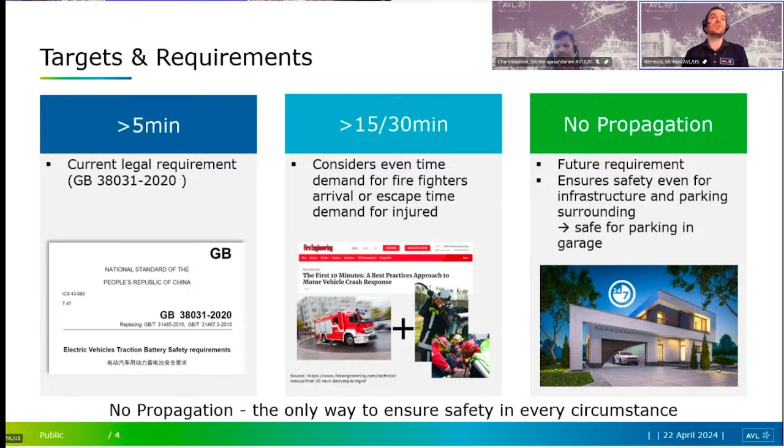Some of the requirements and targets within the automotive industry regarding battery safety: they want to be able to have no more than - I guess 5 minutes is currently the legal requirement to make sure the battery is safe for at least 5 minutes. Then there are other requirements for 15 to 30 minutes because it takes time for the fire department to show up. In theory, you really don't want any propagation outside of the pack, because these vehicles will be parked in garages that can cause peripheral damage to the house or parking structure, with other vehicles nearby. So just because you meet the regulation doesn't necessarily mean that's the ideal product. The regulation is just there as guidance, but almost all the OEMs want an ambition for no breaching of the pack.

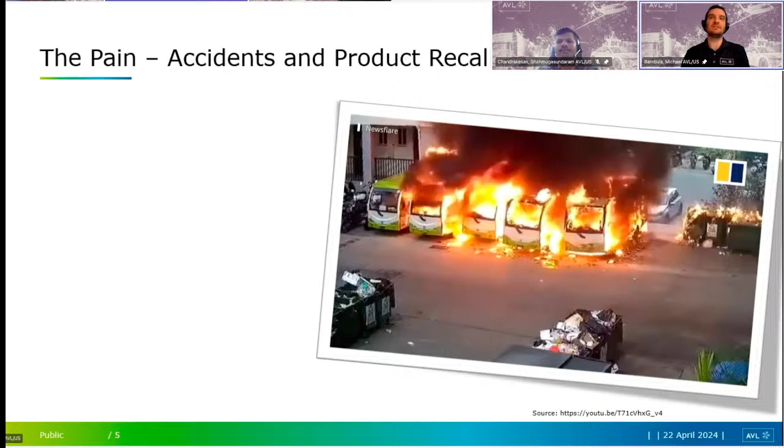This is an example of why you might want that. This is a bus fire that occurred in China. You can see this bus was an electric bus, it caught fire, and there are other buses around it where it's actually spreading. Because you had the problem in one bus, it should have just been contained to the damage of that single bus, but because it breached the pack, it spread and caused other damage it otherwise wouldn't have. Especially with such a large energy release and all this smoke and chemicals, you likely are going to have an evacuation of the vicinity because these are toxic gases - residents will also likely have to leave and quarantine from the area. So that shows the damage you can have from a thermal runaway.

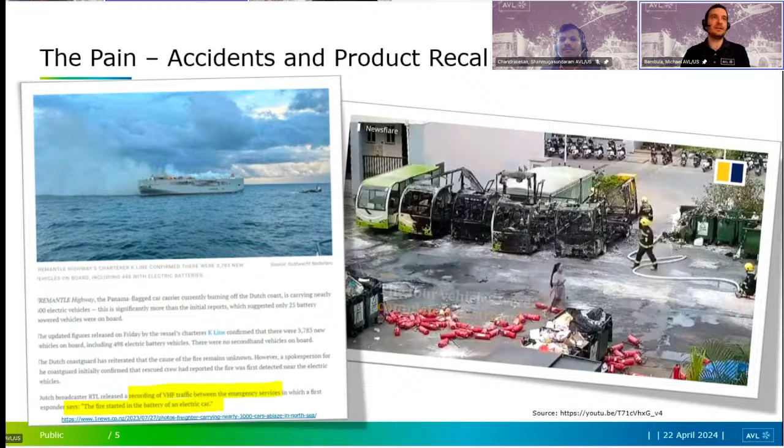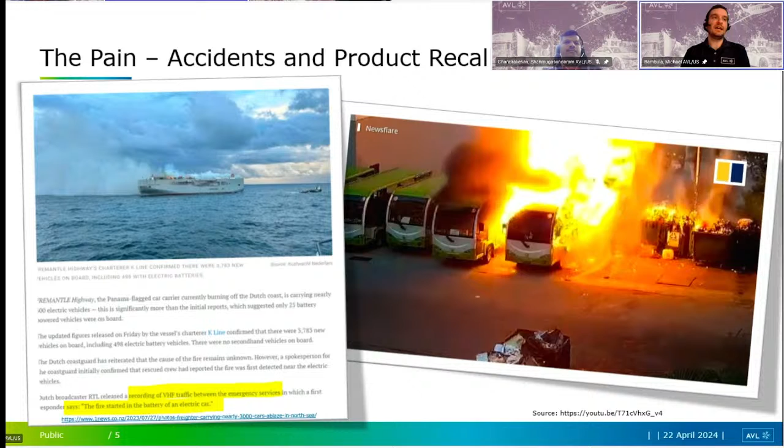This was another event that had occurred. You may have heard about these boats that catch fire while transporting vehicles from Europe to the U.S., or U.S. to Europe and Asia, wherever they go. This boat had 500 electric vehicles on board, and they mentioned during the emergency call that a fire had started with a battery electric vehicle, which effectively spread throughout the vessel and caused collateral damage to the other vehicles. Even more risky, fire at sea is one of the worst things on a boat because there's not much you can do at that point, and it can definitely cause the boat to sink. So these are some of the challenges of why you want mitigation of that thermal runaway event - you either want it contained for as long as possible, or ideally never breach the pack.

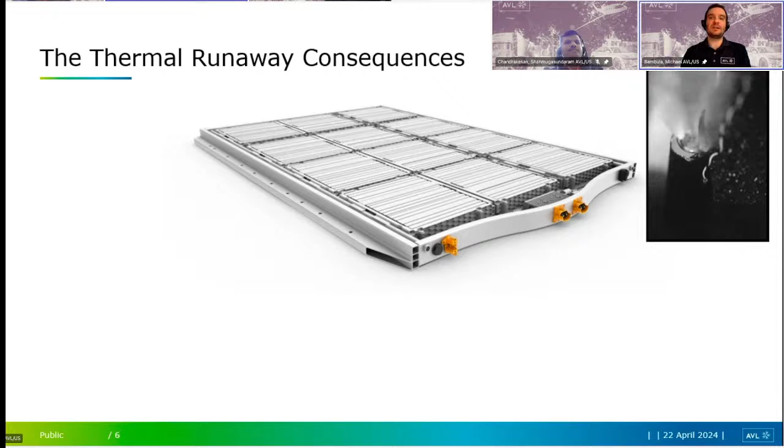So these are just some of the thermal runaway consequences here. All of these are very loud events with this microphone, but basically what you're seeing is particle release from when a thermal runaway event occurs.

You're seeing venting into the vehicle underhood. So this is a breach, but it could be a strategic breach due to relieving pressure. There's also deformed packs that can occur during thermal runaway, and then you have melting and flammability.

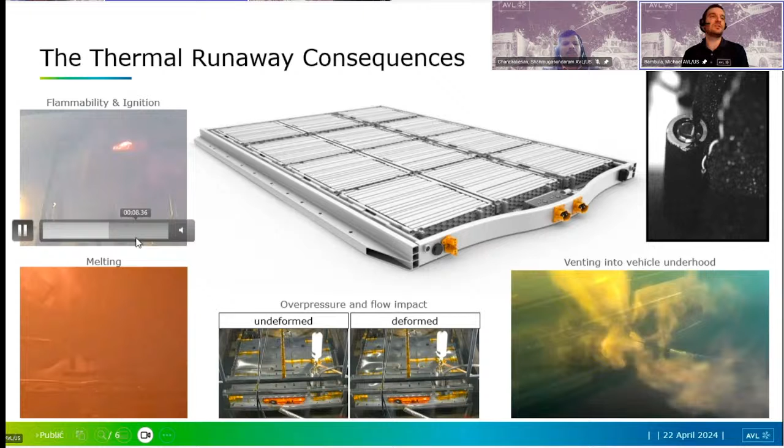Obviously here you could see the flame coming out of the pack and igniting the electrolyte. So yeah, that's pretty much those failure modes.

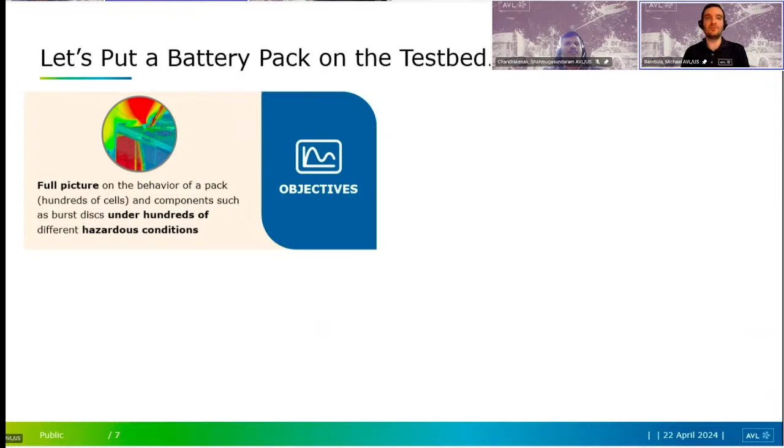And then what AVL really says is if you're trying to evaluate this under testing, it's very, very difficult to do that because you have so many different combinations and variations that can occur. You have hundreds of cells in a pack, and you don't know which ones will actually go into thermal runaway. So you right there introduce a lot of variation and uncertainty.

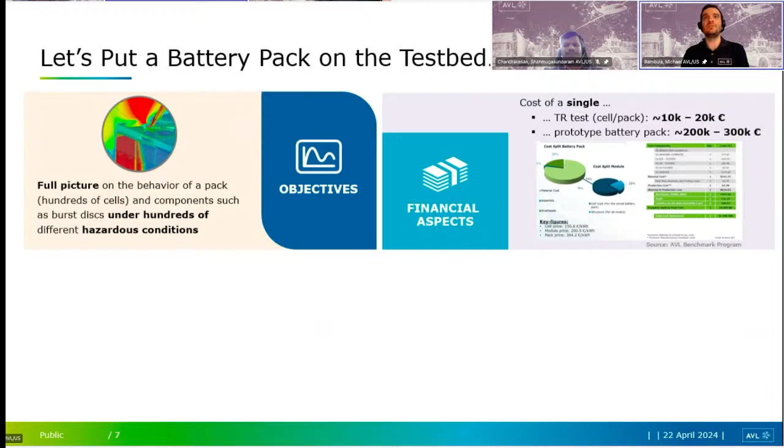Also, testing thermal runaway costs a lot of money. So just a single pack could be tens of thousands, if not hundreds of thousands, when you go to the prototype side of things. So these are quite expensive.

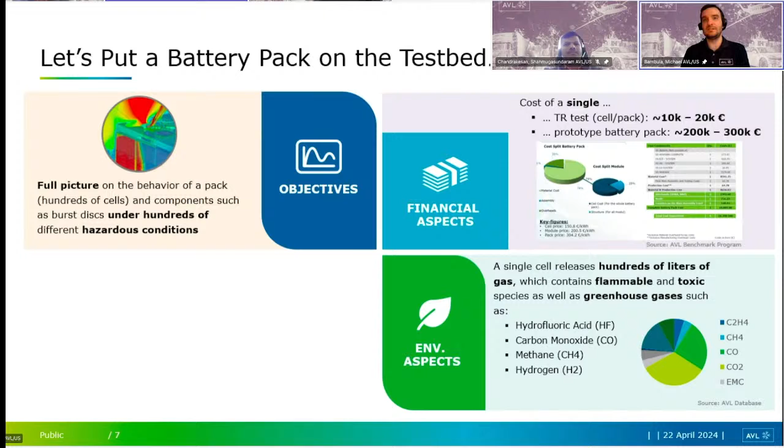Obviously there's an environmental aspect, so you can only do this test in very specific places around the world, because of what's released. So you need a specialized facility.

And finally, what AVL says is, ideally combine some of your testing initiatives as well as your simulation to better explore the design space. So you would use a test to obviously help parameterize your simulation. But then once your simulation, you have some confidence in it, you can do those studies, like I mentioned, where you're triggering different cells within the pack.

You're also attempting to vary different pack designs so that you can see if you can actually contain the thermal runaway event.

So these are just some of the pain points really that I'm going to summarize here, and then I'll pass it off to my colleague Shan.

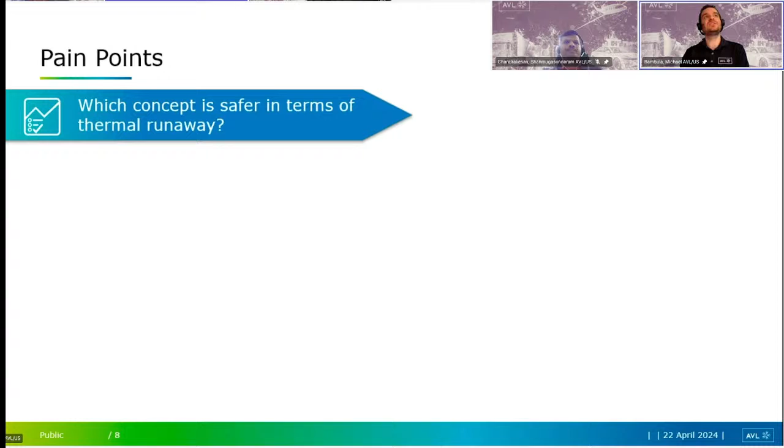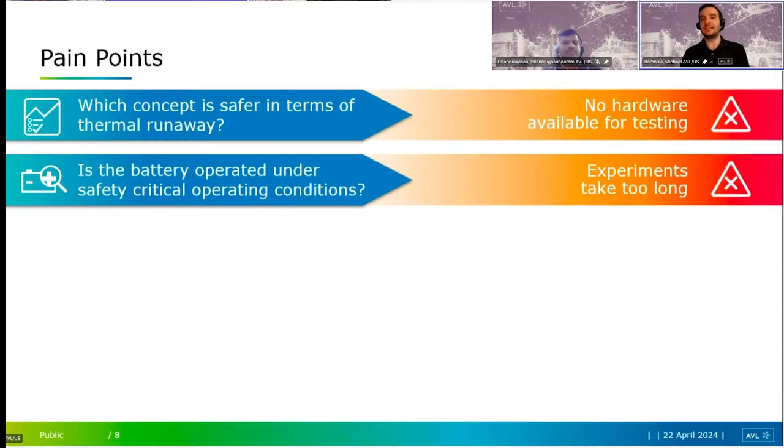But yeah, so which concept is safer in terms of thermal runaway? You don't know that if you have no hardware available for testing. Is the battery operated under safety critical operating conditions? You obviously want to assess that, but it takes a very long time.

You don't know if the pack is going to pass any of the certification tests because the experiments are dangerous and expensive. So you don't want to really iterate when it comes to certification. You want to be sure.

And then, is your design doing what you're attempting to do here? Does it stop the thermal runaway or contain the thermal runaway? Usually, if it indicates that in a test, that doesn't necessarily mean it will indicate that for all types of thermal runaway events. So the experiments don't really give a clear answer.

And then, what if I change my cell chemistry or use old cells that are repurposed or something? There's a lot going on about second life batteries and things like that. Or what if I need to change cell chemistry to something better midway through the program or midway through the vehicle life? Can I still use the same pack design?

This also is a challenge because you don't have many experiments to be able to run there. And like we mentioned, these are tens of thousands, if not hundreds of thousands per experiment.

So effectively, this is the reason why AVL pitches this idea, and we have our customers doing it. We do it in our consulting projects where we do a blend of testing with simulation, because the simulation allows us to explore the design space and answer some of these questions.

And so now I'm going to pass it off to my colleague Shan, where he's going to show you guys some really interesting simulations and show some cool stuff of what we do at AVL.

And you're muted. Just unmute yourself, please. Thanks. Thank you. Thanks, Michael.

Definitely, I can explain about our approach in addressing all the pain points that you showed in the last slide, and providing full thermal safety for any battery pack that a customer has.

Okay, and here the virtual battery development process is key in solving all the battery thermal related problems. First, I would like to address what modeling capabilities we have and use in this regard. During normal battery operations, we know that heat is being generated due to the continuous charging and discharging cycles, so accurate modeling of the heat generation process is a first step.

For that, we have four different methods where customers can choose based on their inputs available and based on their convenience. For example, we have a simple method called ohmic heating, and also equivalent circuit models where the customer can give discharge curves as an input for different C rates and different temperatures, so that they can get the parameters to mimic the actual heat generation process in the particular cell.

If you have a good amount of resources and time, you can run a detailed electrochemical modeling to get the heat generation process. But let's say you don't have any of this, no idea about this particular cell, no material properties, anything about the cell, then we have a solution called Batemo.

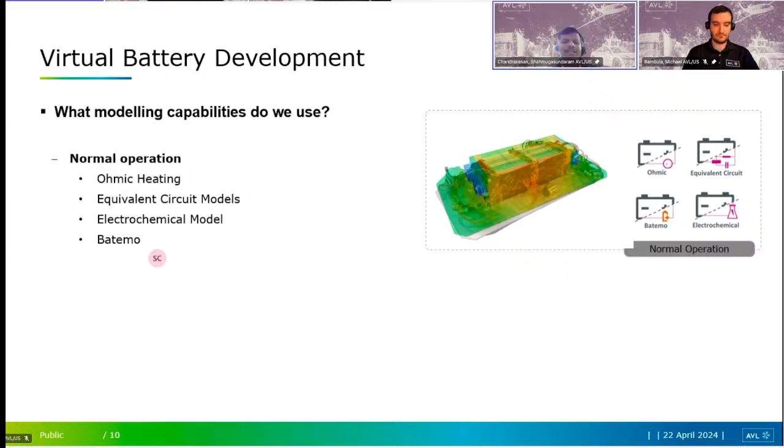Batemo has a cell library in-house with mostly all of the battery cells available in the market, where customers can just go and choose the cell they want to analyze, which directly gives the temperature distribution for the given operating condition.

Once we get the correct temperature distribution, we can include all the hazard scenarios, starting from basic thermal runaway basic effects, there are a lot of basic effects which I'll go to in the next slide, and including advanced effects like solid body chemistry, particle ejections, arcing, and pack deformations.

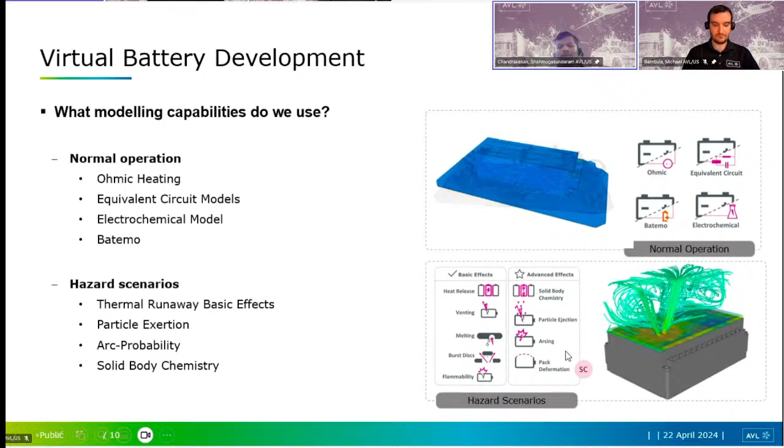So let's take a detailed look at what effects we cover in AVL using our AVL software, and what different hazard scenarios we're able to simulate.

When I talk about basic effects, the heat release happens inside the cell because of electrochemical reactions, and once heat is released, the electrolyte starts to evaporate and pressure starts to build inside the cell.

Once the pressure reaches a certain level, the vent opens in each cell and the venting gases come out. These venting gases don't come out alone - they carry harmful flammable gases, particles, and a high heat along with them. So wherever it goes, it starts to melt the components.

When it melts the components, it makes additional passages where the venting gases can easily flow through, and wherever it goes it starts to heat the component, which is not really good for us. That's happening all along the places.

Once it transfers the heat along the way, it finally finds the burst discs where the venting gases really vent out from the battery pack, along with a flammable gas. These venting gases aren't just carrying heat, they're also flammable - that's why we've seen in Michael's slide the flames all over the places. So these are the basic effects that we have.

Of course, I'm going to talk about this next, so let me answer your question as well. Remember, AVL FIRE was for internal combustion engines, and we ran combustion all the time, so we use the same chemical reactions to solve the same physics here.

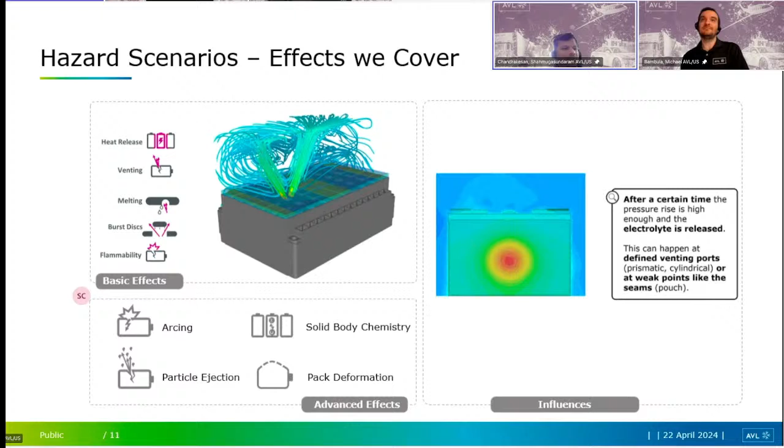Yeah, so I guess this is what you're talking about, the heat release caused by the chemistry reactions. Exactly, in the heat release. The heat release can be for several reasons, that's also what we are going to talk about next. It can be a short circuit, or it can be aging. It can be degradation of the battery, or decomposition of the SEI, and all those things.

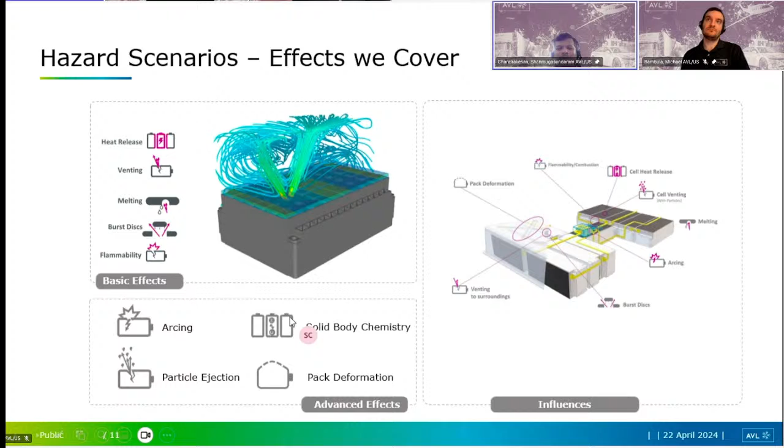And yeah, here's venting. Venting is happening, and then melting is next, you can see melting happens around the places. And finally here we see the venting gases going out of burst discs. Of course, that's the last result we wanted to simulate in our simulation environment, because our primary goal is to prevent the propagation itself. We don't want the gas to go all over the places and destroy everything and go out, because at that point there's really less advantage we have.

Okay, now onwards we are going to discuss the different hazard scenarios happening during the thermal runaway process. First thing, I'm going to talk about the arcing possibilities. Here the physical phenomena is whenever a short circuit happens on the battery module or battery pack level during thermal runaway, the breakdown voltage of air is decreased due to the venting gas and particles. This is a physical phenomena, and in the bottom we are showing how we do it in modeling, as well as what inputs are required.

So technically, we use physical approaches like Paschen's law and measurements to develop an easy to understand arcing probability. The main inputs are the voltage and current involved in the battery modules, the gas composition of the venting gas, and thermodynamic and mechanical properties of it. The animation shows the simulation results. Technically, we took 2 electrodes and put them at a certain distance, then ran the simulation using Paschen's law, and it calculates the breakdown voltage.

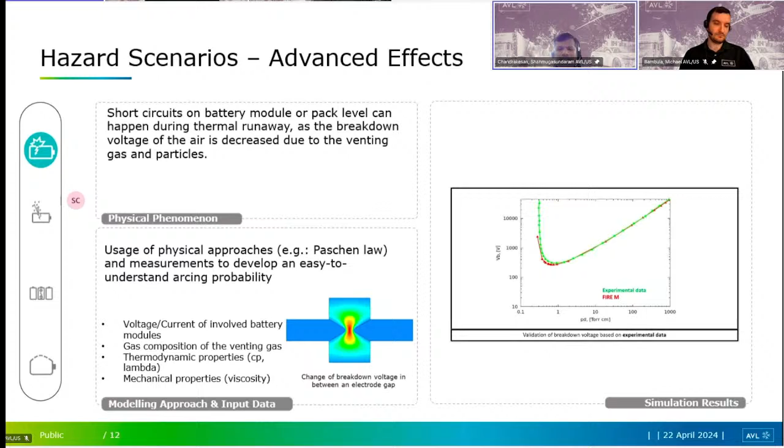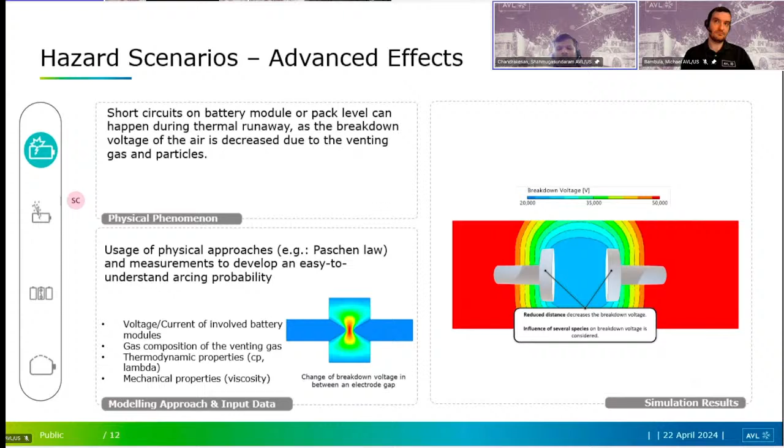Here you can see the results comparison between FIRE and experimental data. Later we reduced the distance to see what kind of breakdown voltage we get. Technically, by reducing the distance, it reduces the breakdown voltage as well, which we are clearly able to predict.

Now let's move on to the next topic, which is particle ejection during the thermal runaway process. Again, this one we slightly talked about a couple of slides before, where the thermal event happens inside the battery cells, the molten particles are exiting out from the battery cell, and of course this is not only solid particles, this is also carrying high heat.

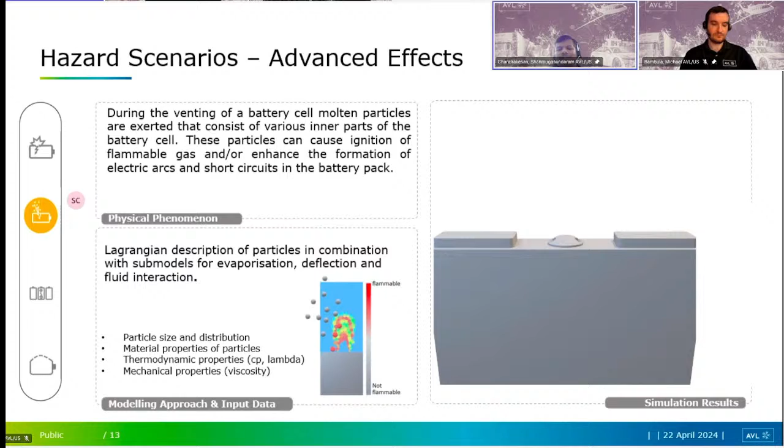Wherever it goes, it melts the component, and here you can see in the simulation results the particle ejection is shown clearly, as well as it deposits because of gravity, and wherever it touches on top, it melts the component. When it melts the component, the venting gas happily travels in other directions because it got an extra passage, and it can transfer the heat and continues to melt other places.

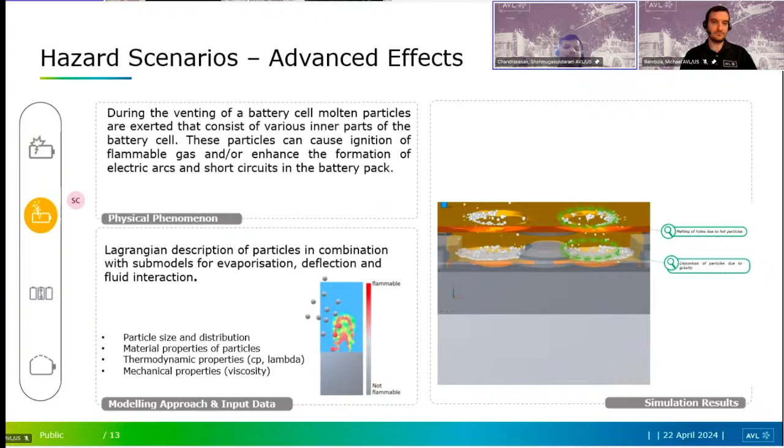So this is also a very important thing to simulate, and here we are using the Lagrangian approach to simulate the particles with a combination of submodels for evaporation of electrolyte and deflection and fluid interaction between the venting gas to the solid. The main inputs are particle size and distribution, material properties of the particles, and thermodynamic and mechanical properties of the venting gas.

Moving on to the next one, which is solid battery chemistry. In this case, the heat release within the battery cell is due to the decomposition of SEI and melting and reaction of the different components like cathode and anode, mainly driven by the chemistry, but it is possible that the chemical reactions happening with the cathode and anode materials also contribute.

So how do we simulate it? We simulate it by defining the anodes and cathodes as representative species, and then we define their respective heat release and reaction mechanisms. We use detailed chemistry calculations of the battery components, defined as representative species. The main inputs are mole fractions of representative species and reaction enthalpy for reaction equations of representative species, technically anode and cathode and different components.

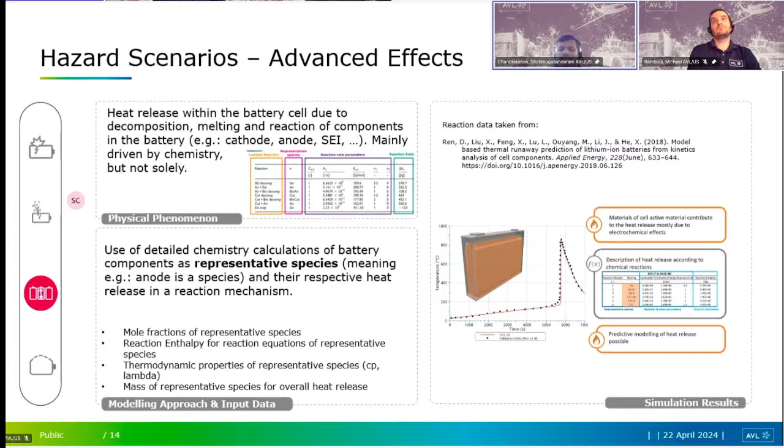Coming into the last topic of hazard scenarios: we all know that when thermal runaway happens, venting gases come out, with high temperature and high pressure. By that, the entire pack is swelling. You might have seen videos of how it first swells and then bursts. So swelling of the battery pack is quite common during this thermal runaway process.

If we don't include that in our simulation environment, we might be missing very critical parameters. When the venting gases go out with bulged geometries, they have more place to move, so based on the new route, the temperature distribution of the next cells, modules, or components is going to vary. So it's very important to simulate the swelling effect.

For this case, we use a CFD and FEA workflow. From CFD, first without any swelling, we run the simulation and find the temperature and pressure of the surfaces of the battery pack, cell, and other components. We give this to FEA, which runs the thermal deformation analysis and gives the thermal deformation coordinates back to us. We implement the deformation in the FIRE M mesh, then run the simulation.

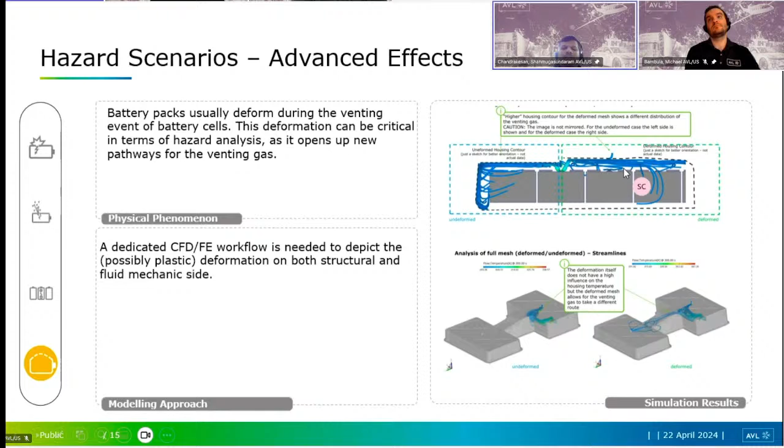So this is how we can predict it. On the right hand side, you can see two boxes: one is undeformed mesh, the other is a deformed mesh. With the undeformed mesh, you can clearly see the venting gas flow pattern. On the other hand, when the swelling happened and it bulged, you can clearly see how it looks different.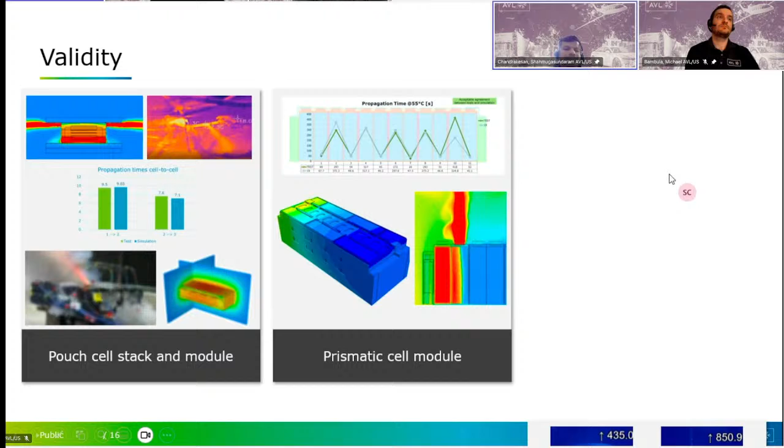And of course, we ran several validity cases. We ran a pouch cell, quantifying the results comparing the propagation time between experimental and CFD, and also a prismatic cell module.

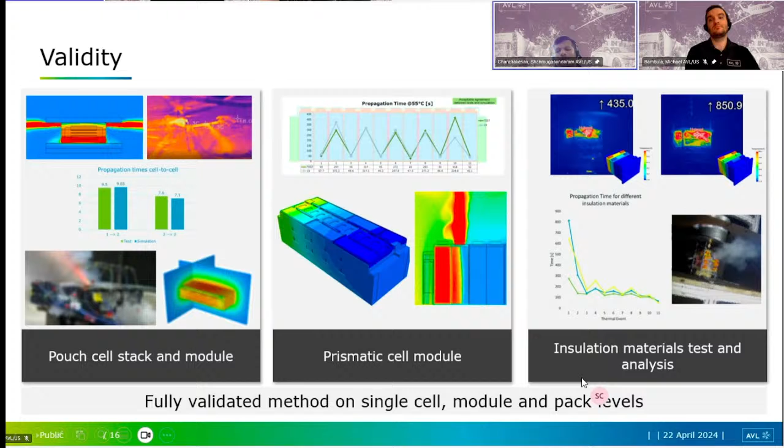We ran the same simulation varying different insulations, and validated the results as well. So our software is fully validated, and we've done many customer projects. Here I'm going to show you some demo cases with real examples.

Here you can see this is an 18650 module, and here the defective cell is number 1, where the thermal runaway happens. This is a standard case, and we also added insulation around it to see how the thermal runaway really propagates.

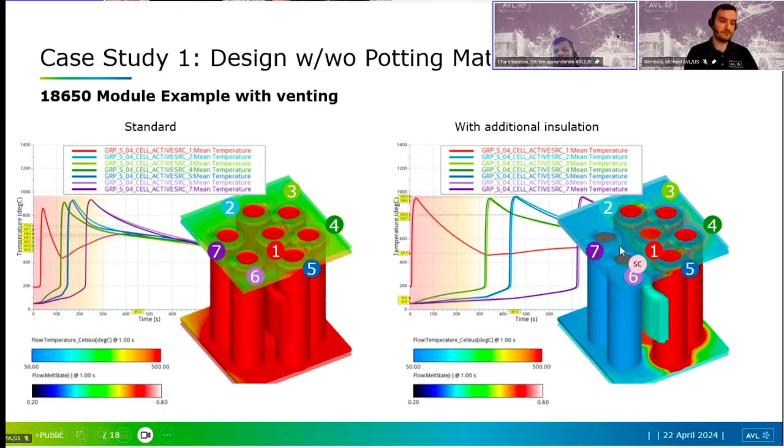This is all to get to the 5 minutes regulation rate. Without any insulation, within 5 minutes all the cells go into thermal runaway. On the right hand side, you can clearly see the defect cell goes into thermal runaway, but because of insulation, we get 5.5 minutes of time where passengers can easily get out, because not all the cells go into thermal runaway within 5 minutes.

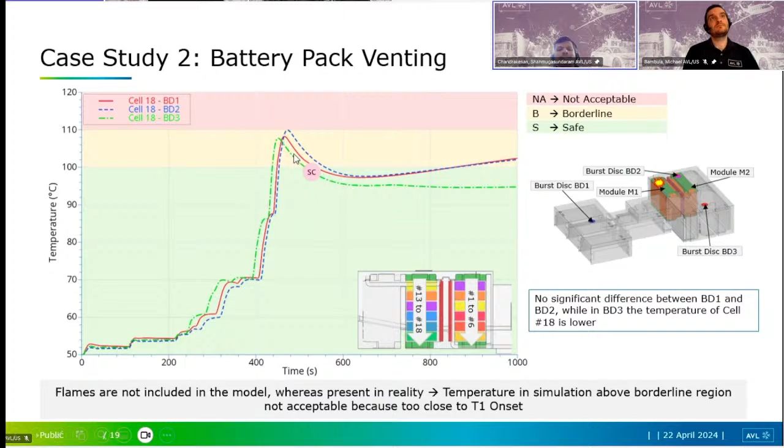In case study 2, we varied the burst disc locations: BD1, BD2, and BD3. The color code shows which is safe, which is borderline, and which is not acceptable at all. In this case, all are borderline, but the third one, BD3, gives better results, with lower temperature showing a lower possibility of thermal runaway.

We ran several different analyses with different strategies to prevent or delay thermal propagation inside the battery pack. I'll show you one case with a flame barrier introduced between the modules. Because of that, the venting gas passes through on the sides and doesn't really melt the other components along with it. But on the other hand, it actually quickens the propagation inside the module itself, quickening the temperature distribution and destroying the module itself.

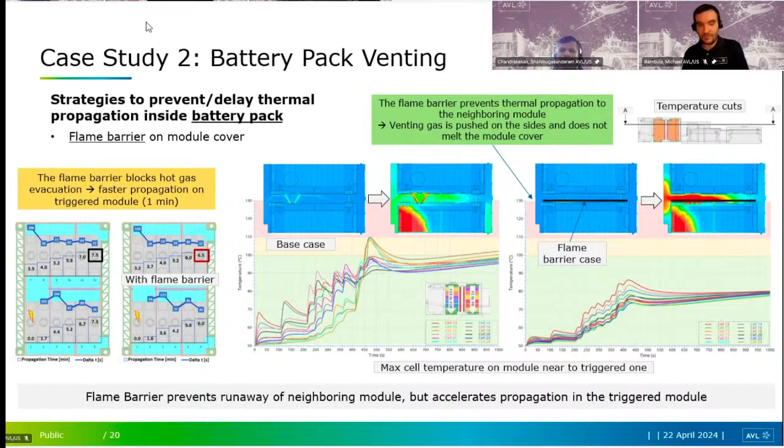Appreciate it, Shan. Yeah, those are pretty good use cases, and I think that encompasses a lot of capability within battery thermal runaway modeling that we have at AVL. This is a customer success story that we had with Vertical Aerospace. They're an electric airplane company, and they wanted to understand thermal runaway of their battery packs, because when you're in the air, it's likely the last thing you want, just like when you're out on the open seas.

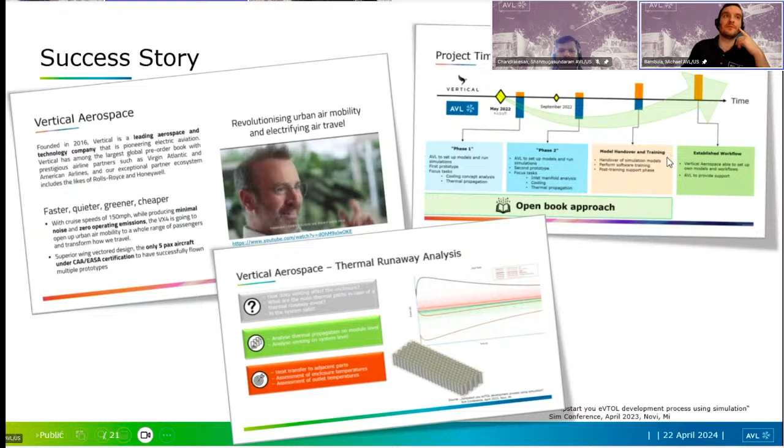So we had a big project with them. We had a timeline here that we've developed for them, and this is something we can do with any customer. You can see here that we wanted to answer some questions, basically, how does the venting affect the enclosure?

What are some of the main thermal paths in case of a thermal runaway, and is the system safe? So we did a thermal propagation analysis on the module level, and we were analyzing venting, and we wanted to really target some heat transfer to the adjacent parts and understand that, as well as assess the enclosure temperatures and the outlet temperatures when it vents.

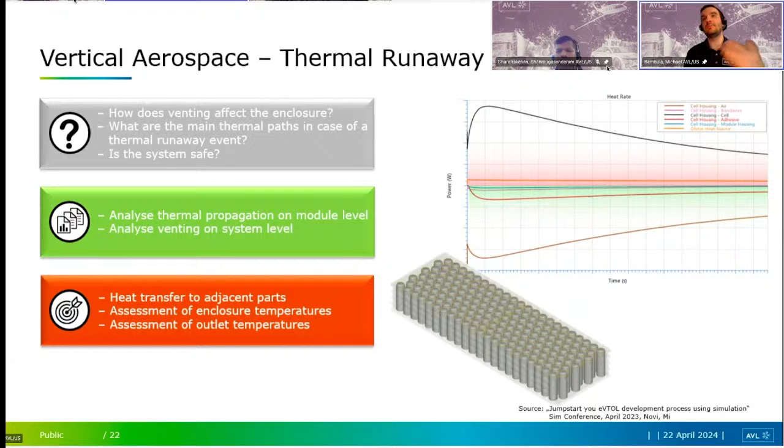So what we ended up doing was a thermal runaway study here, and we have more material that we presented at our conference last year, where the Vertical Aerospace work was presented. If you want to learn more, we can definitely have a discussion there. This is effectively a thermal runaway of one of the cells within their module, and trying to understand the venting and what the temperature influence would be around the peripheral components there.

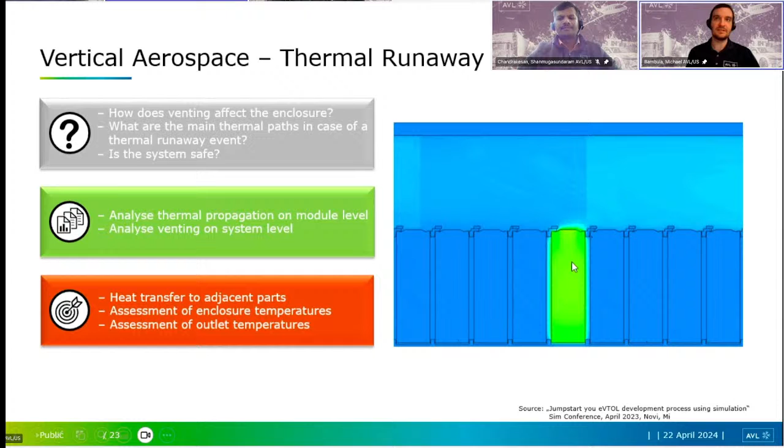I guess just to sum up one more thing, we have a question from Prakash—he's been quite engaged with us, which I appreciate. He wants to understand how we can make an aging analysis with the battery. He's really asking how many charge cycles can the battery sustain, and after that, what is its chance of thermal runaway? So we have a battery degradation model for battery performance and aging—an electrochemical aging model, where the chemistry will actually change within the battery as it's being cycled.

Now, if you're trying to understand exactly when the thermal runaway event will occur based on changes in chemistry, that is a bit more complicated, and it's an ongoing area of research within AVL, as well as something we're working on with different OEMs. That's what I'd consider the golden question of battery safety: how often can I cycle my battery until it actually goes into thermal runaway, which is quite a difficult thing to answer when you consider all the variations—manufacturing variation, chemistry variation, cell construction variation, things like that.

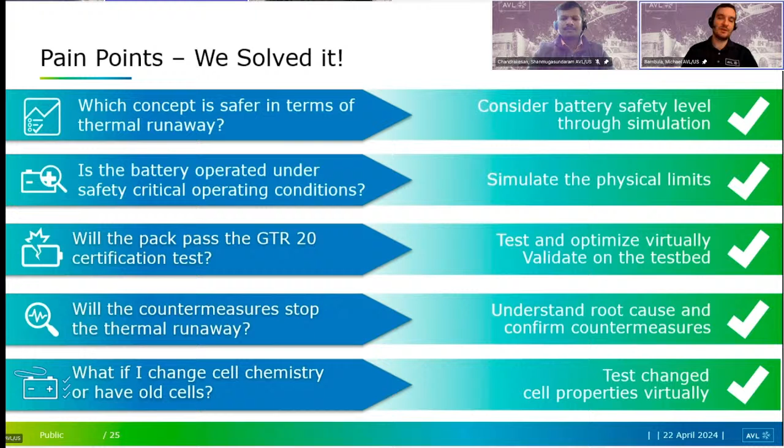So to say, that was pretty much our presentation, and I guess I'll pass it off to Thomas to discuss what we have upcoming for our LinkedIn Live events.